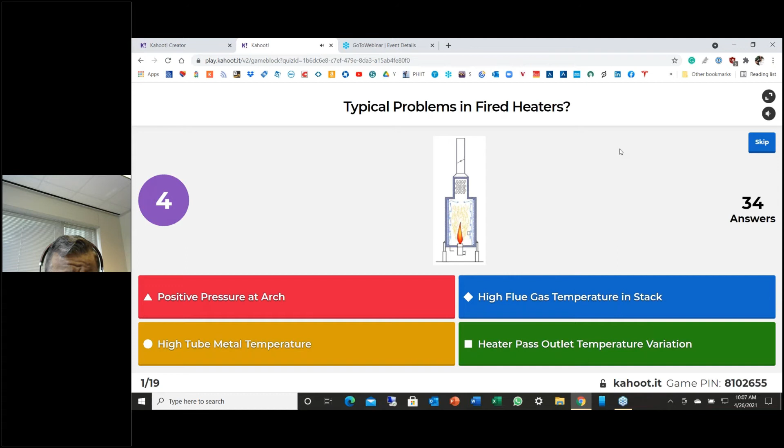So we have 34 answers. We will just see how people rate. So 8 people think positive pressure at arch is the problem. 13 votes for high flue gas temperature in stack. 19 people, high tube metal temperatures. And some people, 8, are thinking heater pass outlet temperature variation.

So thank you for your vote. We will move to the next. So you can see these are the problems which are very common. I added some more problems in fired heaters, things like flame impingement, charge limiting, short run length, bowing of tubes. So just think about what could be happening in your fired heaters and what are the issues which you are facing, so we could identify and then have more attention on these topics.

As you all know, Furnace Improvements specializes in fixing of fired heaters. That's what we do for a living. We are always improving the performance of fired heaters, whether we are fixing the short run length issue or flame impingement. All right.

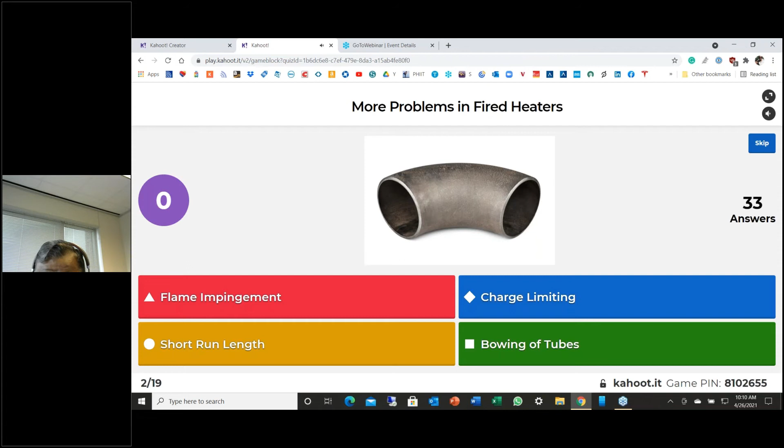So 67% think flame impingement is a big problem, and I agree very much with them because we also feel flame impingement has been exacerbated ever since we got the low NOx burners. Ever since we got the low NOx burners with double or triple the flame length, the flame impingement problem has been experienced in a number of heaters. And then the short run length, that's another, maybe a direct relation coming from flame impingement. So thank you again. Good response.

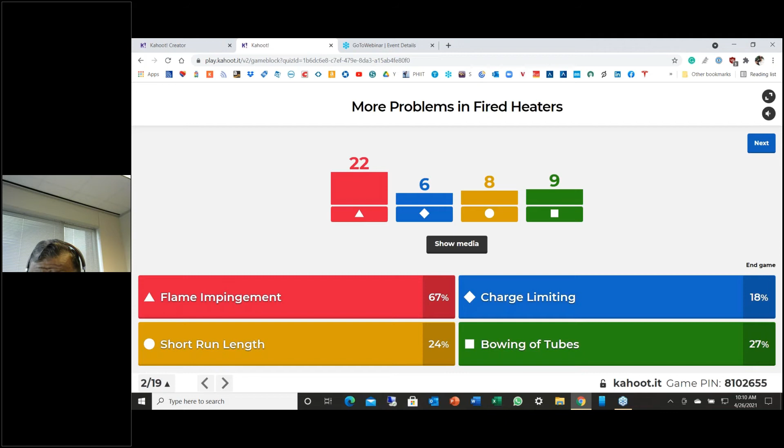So where do we use fired heaters? You know, given a choice, I think process engineers won't like to even put a fired heater. They may want to use a heat exchanger, or something similar. So let's find out where the fired heaters are being used.

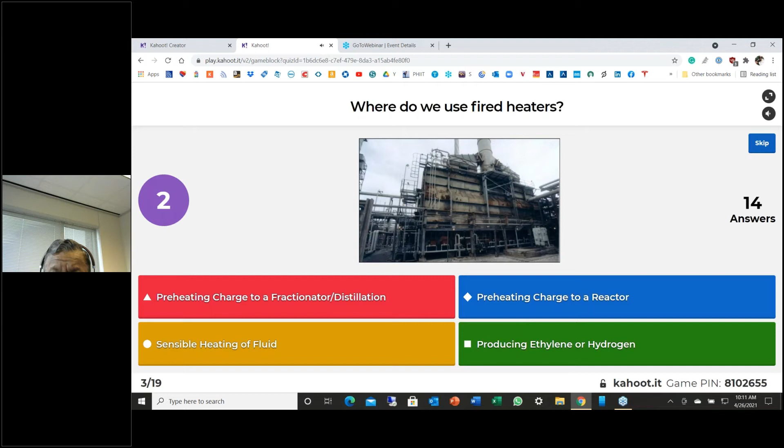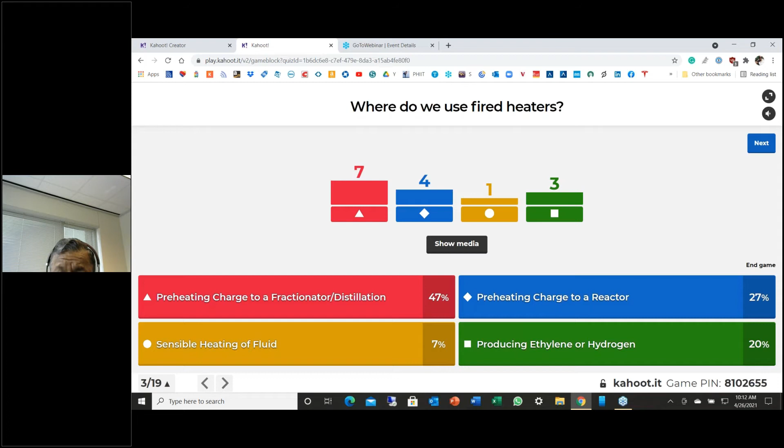So most, 50% of the application, is in preheating charge to a distillation column, maybe like a crude column or vacuum column. Some places it could be preheating charge to a reactor like a hydrotreater or hydrocracker. Some could be sensible heating of fluid, like maybe a hot oil heater. And then the other application is producing ethylene or hydrogen. So I'm happy there are three people who have ethylene applications.

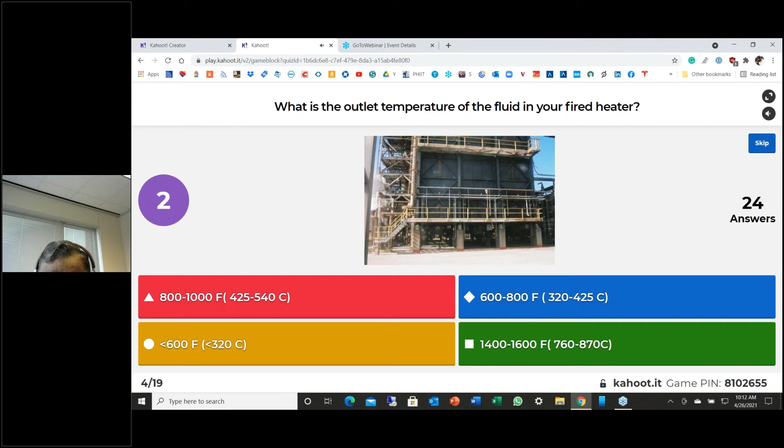So if you have a fired heater, why don't you let me know what is the outlet temperature of the fluid in your fired heater? To what temperature do you heat the fluid? It appears I have only given 30 seconds, so you need to act quick. Maybe next time I can add more time, but since we have limited time, I kind of did this.

So most of the heaters, as you can see, heat the fluid to about 600 to 800 degrees F. That's typical. There are some heaters, like coker heaters or platformer heaters, where we go up to 1000 degrees. Less than 600 are typically hot oil heaters or reboilers. And then the 1400 to 1600 range is in steam methane reformers or ethylene crackers. Those are specialized. So you can see we have applications of fired heaters with different outlet temperatures.

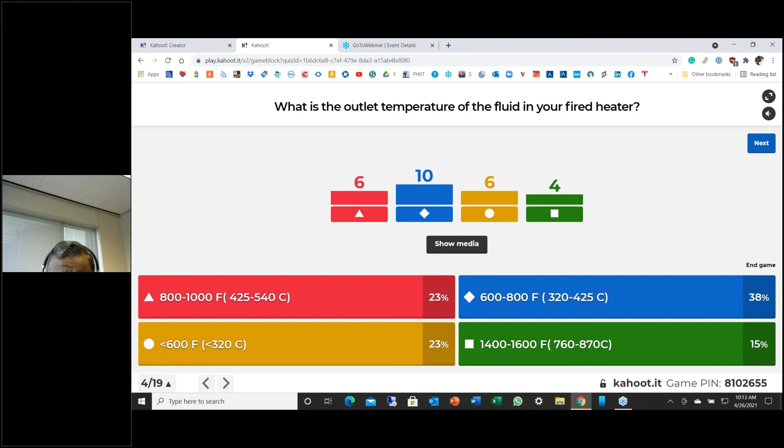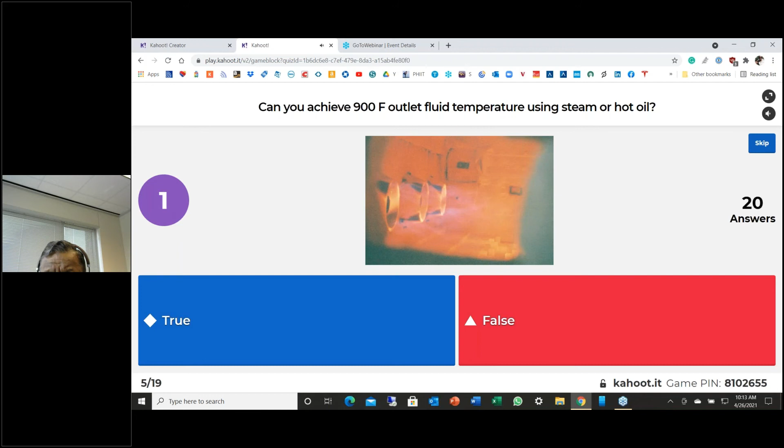So my question here is, can you achieve 900 degrees outlet fluid temperature using steam or hot oil? Is it true or is it false? Well, most of the people think we cannot get up to 900 degrees outlet fluid temperature using steam or hot oil.

And I think it's very important to understand that process engineers use heat exchangers as their first choice. In heat exchangers, you can have steam heating, you can have hot oil heating. But after 600 or 700 degrees, the hot oil starts coking up and the steam pressure keeps on going up. To achieve 900 degrees, the heating fluid has to be at least about 1000 degrees so that we can have the approach. So that is one reason heat exchangers cannot be used in place of fired heaters.

This reminds me of a story: there was a Russian engineer who designed a nuclear-powered refinery.

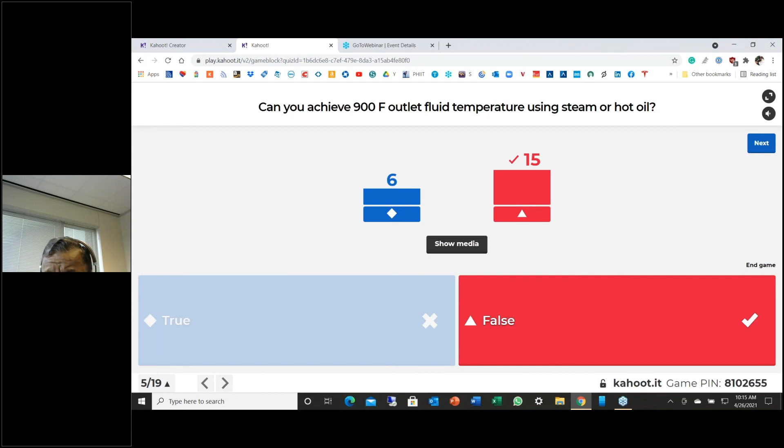He said, we will just put one nuclear reactor in the center of the refinery, and I will supply the heat to all the users from that reactor. But he ran into problems, and the problem was he could not find a suitable fluid which could transfer heat at 900 degrees or even 1000 degrees. So he ran into problems. I mean, even molten salt cannot do it. So that's one reason why fired heaters cannot be replaced with heat exchangers.

So just to give you a picture of the refining industry in the US, we are in survival mode. The number of refineries has been coming down. 40 years ago, I think there were more than 300 refineries in this country. Today, we have only 120 refineries operating. The good news is the refining capacity in the US has more or less remained steady or even gone up. That means the existing refineries are being revamped every 5, 7, 10 years to increase the capacity.

So my guess is there are about 2,200 heaters in the US, out of which 90% are natural draft, 8% are forced draft and only 2.4% have an air preheater. This picture is very different when you go to Asia. In Asia, because of the high fuel gas cost, 85% to 90% of the heaters are balanced draft with air preheating systems. Average size of heater in the industry is about 72 million BTUs. The forced draft or balanced draft heaters tend to be bigger, at about 110 million BTUs. So that is the picture.

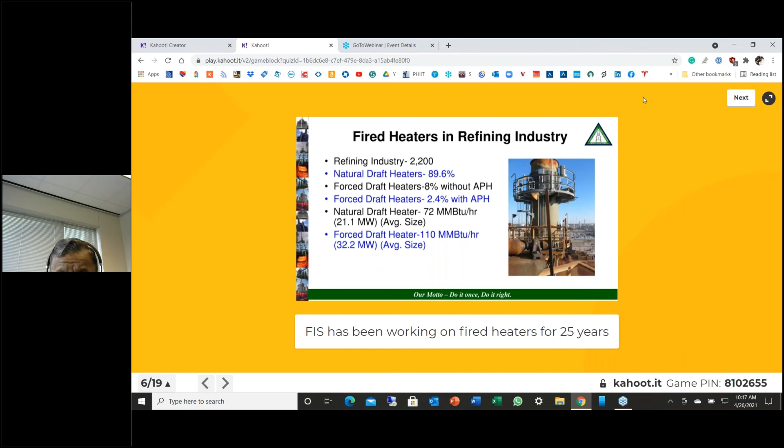So fired heaters are nothing but a large heat exchanger. They are used for high temperature heat transfer. The energy for heat transfer comes from the combustion of fuel, and radiation heat transfer plays a very significant role. And we will talk about many variations of fired heaters: single fired, double fired, top supported, bottom supported, vertical and horizontal tubes.

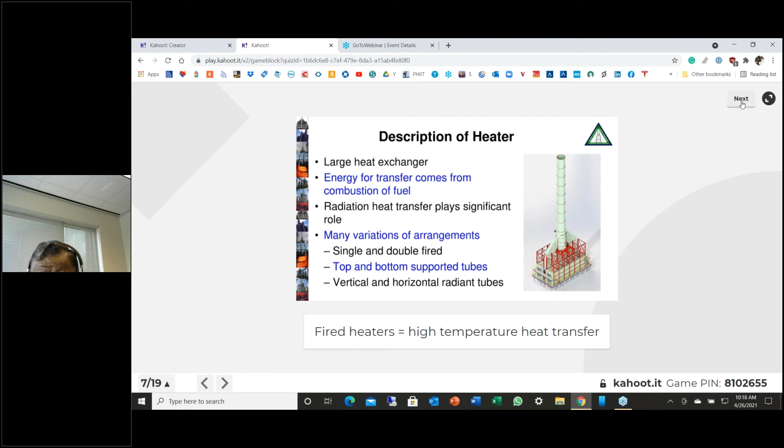So here is a guess. You want to take a guess? What is the temperature of the flames? I'm looking for the adiabatic temperature, before giving out the heat.

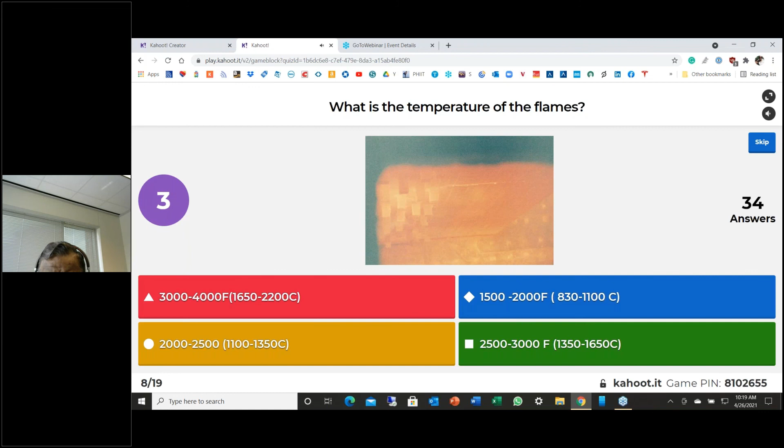So some people think, okay, most people think the flame temperature is in the range of 1500 to 2000, or 2000 to 2500, or 2500 to 3000. The real temperature of the flame before it gives out the heat is in the range of 3000 to 4000 degrees F, or 1650 to 2200 degrees C. So you can see the flames are really, really hot.

If you look at methane, ethane, we will go more into that, they typically burn around 3200 degrees. If you talk about carbon monoxide, hydrogen, ethylene, propylene, acetylene, you will see them in the 4000 degrees F range. So these are the adiabatic flame temperatures we are talking about. Flames are really, really hot, and that is why we are able to heat up to 1500 or 1600 degrees F in ethylene crackers or 1400 to 1500 degrees F in steam reformers. So flames play an important role in radiation heat transfer.

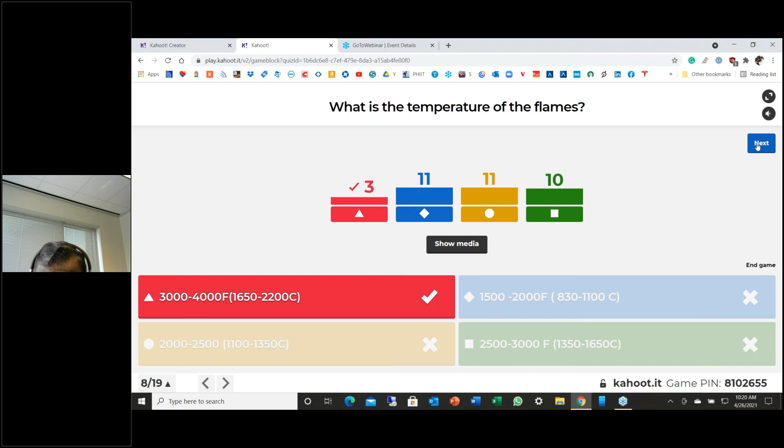So what is the typical temperature in the radiant section or firebox? I'm talking more about refinery heaters. What temperature can we expect in refinery heaters, after the flames have given out the heat? What is the temperature?

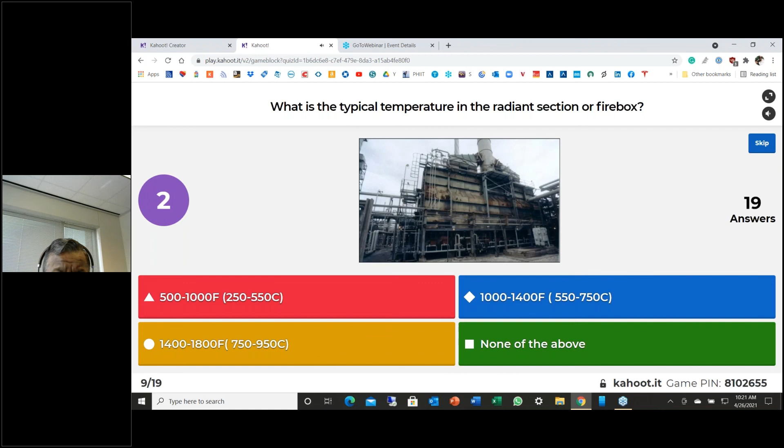So the correct answer is around 750 to 950 degrees centigrade, and most of you got it right, or 1400 to 1800 degrees F. Below this temperature, the radiant heat transfer is not very effective. We will talk more about it, but anything below 1400, the Stefan-Boltzmann equation, or radiant heat transfer, is not very effective. So that's why we keep it around 1400 to 1800 to get our heat transfer.